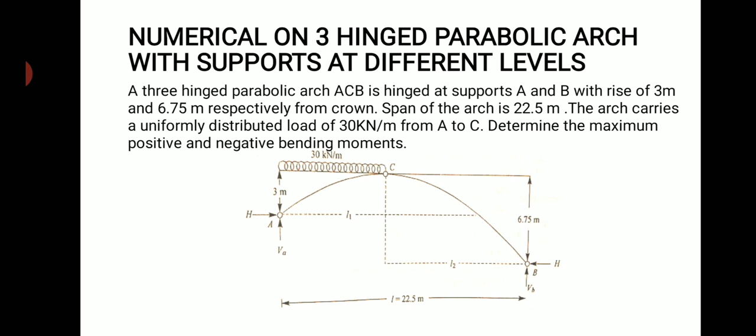Here L is the total span distance, and in the sketch they have given the different heights of the rise from the respective supports, but they haven't given the values of L1 and L2, wherein L1 is the length between the support A to C, and L2 is between the support B to the crown point C.

Okay, so the first and foremost step, in order to determine the positive and negative bending moments, is to find out the different spans between the supports and the crown point. So the first step is to determine the values of L1 and L2.

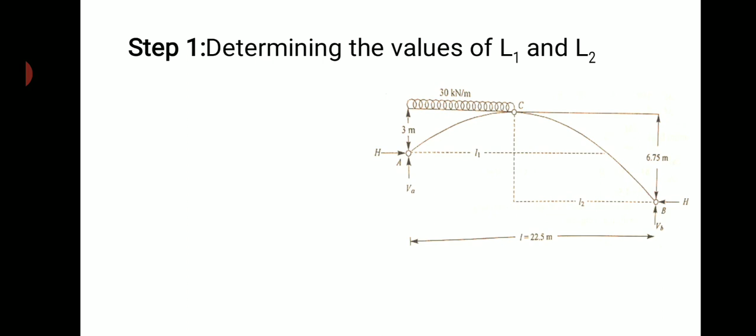Since it is given as a parabolic arch, we have the property of parabola: L1 square by H1 is equal to L2 square by H2. I repeat it, L1 square by H1 is equal to L2 square by H2, wherein L1 is the span between support A to crown point C, and L2 is the span between the support B to the crown point C. H1 is the vertical height of the rise between A to C, and H2 is the vertical height between the support B to C.

So here L is equal to L1 plus L2, and L1 is equal to (L1 plus L2) into root H1 divided by root H1 plus root H2. This formula has been derived from the property of parabola. L1 plus L2 is nothing but the total value, which we can take as L itself. So it can be straight away set as

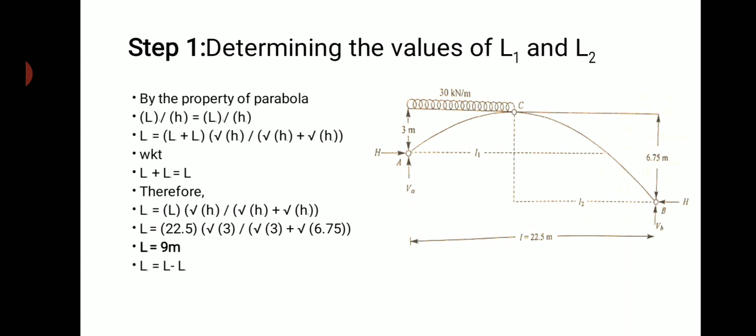Again, we know that L1 plus L2 combined gives L. So L and L1 are known. By this we can find the value of L2: L, 22.5, minus L1, 9 meters. So 22.5 minus 9 gives 13.5 meters. That is the span length between the support B and the crown.

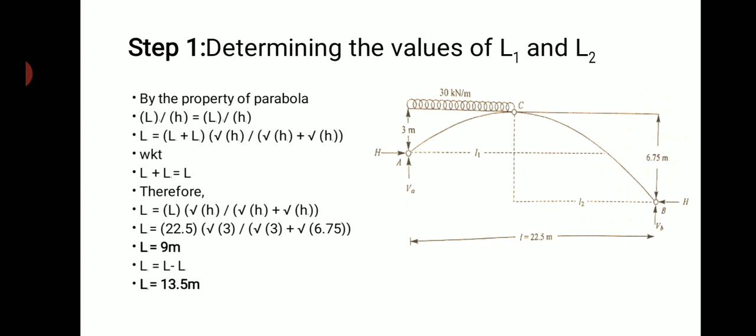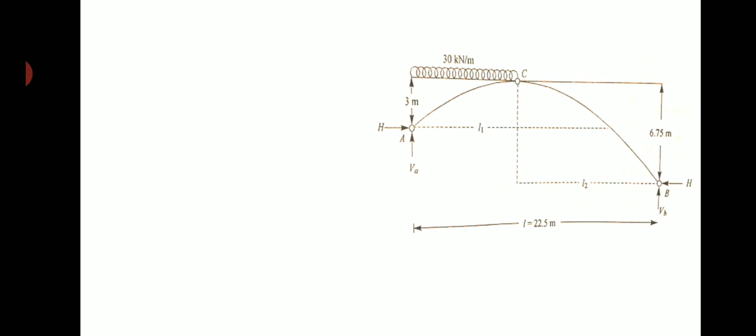Coming on to the next step, applying the equilibrium conditions in order to determine the support reactions. I apply the vertical equilibrium conditions for the arch. For the supports we have two vertical reactions, VA and VB, which are in the upward direction. Upward forces are taken as positive and downward forces as negative as per the sign convention.

So VA plus VB is equal to 30 kilonewton per meter, the UDL load given, acting over the span L1. L1 we have determined as 9 meters. So the 30 kilonewton per meter needs to be converted into kilonewton first, multiplied by the total distance over which the load is acting. So 9 meters is the total distance over which the load is acting.

Therefore VA plus VB will be equal to 30 into 9, that will be equal to 270. Since the 30 into 9 is in downward direction, I have equated upward forces equal to the downward force in order to obey the equilibrium condition.

So the next step is moment about left support, moment about the crown. So I have to take the moment about crown in order to determine the value of H; H is another unknown here. So in order to determine the value of H, that is the horizontal reaction, I need to take the moment about crown. So first I am going to take the moment about crown from the left side support.

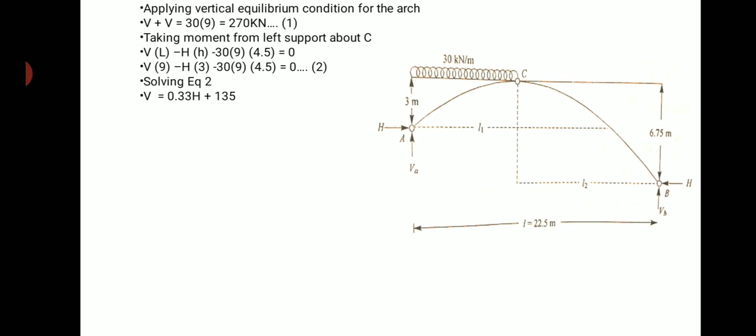Now, since it is a different level of support condition here, I have to take the moment about C point from the right side of the support. Since the supports are at different levels, I need to consider the moment about the crown from both supports and equate that to 0 in order to get the value of the horizontal reaction. The forces acting on the right side are VB and H: only two forces, the vertical reaction at B and the horizontal reaction H.

Again the sign convention here is clockwise positive and anti-clockwise moments negative. So VB into L2 is in anti-clockwise direction, and then H into H2. If I just solve this, I'll get the equation as VB is equal to 0.5 H.

So, from considering equation 1, I have got VA plus VB as 270 kilonewton. So if I just substitute the values in terms of H, that is VA I have got as 0.33H plus 135, and VB I got as 0.5H. So substitute the values in terms of H in equation 1. By solving that equation I'll get the value of H as 162 kilonewton.

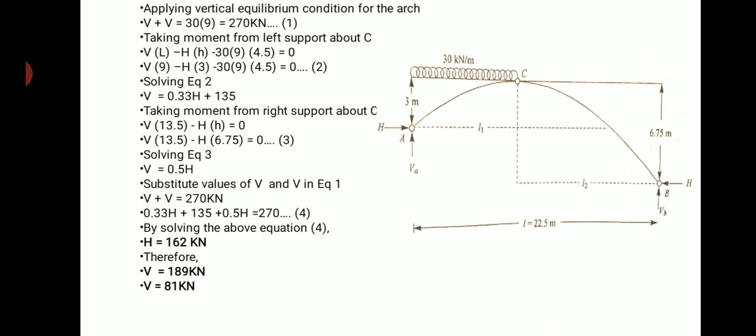So after finding the value of H, if I just substitute the values in the equations, I'll get VA as 189 kilonewton and VB as 81 kilonewton. So by this I have found out the different support reactions. The next step is to determine the maximum positive bending moment and the negative bending moment. The first thing is to determine the maximum positive bending moment.

For that, I always suggest that whenever there is unsymmetrical loading... In the sketch, I can observe that only the left part of the support, the support A side, is subjected to the external loading. Whereas on the right side of the support, there is no external loading; only you have the support reactions.

So by seeing the sketch, you can directly guess where the position of the maximum positive or negative bending moment will be. Wherever there is loading, in that part you can suggest there will be the maximum positive bending moment. So with that assumption, I have taken the left part of the arch.

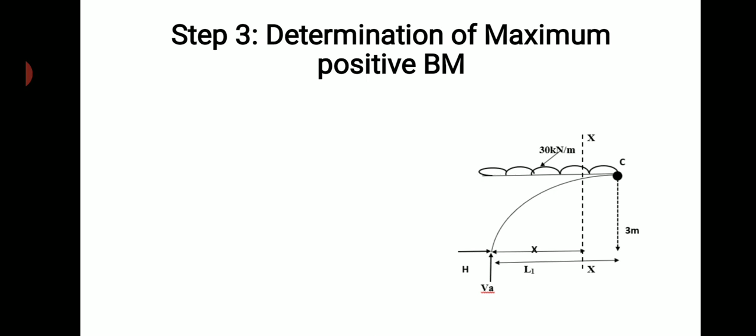I have considered the section xx, which is at a distance x from support A, and which has the vertical distance y, that is the vertical distance between the arch rib and the support level. And L1 is the span distance between support A and the crown.

Okay, so I'm considering the section xx and the moment about section xx. In order to determine the positive bending moment, I consider the moment about xx. Here I can see three forces: one is Va, another is H, and one more is 30 kilonewton per meter, acting over the distance x. It is not L1, it is x, because I am considering the moment about section xx.

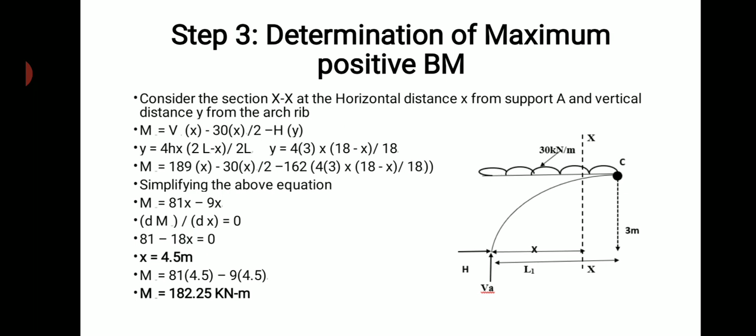If I substitute the value of x in the simplified Mxx equation, I'll get the maximum bending moment. That is 81 times 4.5 minus 9 into 4.5 square. If I do it, I'll get the maximum positive bending moment, that is 182.25 kilonewton meter. So this is how to determine the maximum positive bending moment.

The next step is the determination of maximum negative bending moment. While determining the maximum positive bending moment, we considered the left span, because on the left side of the span the load was acting. On the right side of the span there is no external load, therefore you can directly say that it will be subjected to the negative bending moment. With this assumption, I am considering the right side of the span.

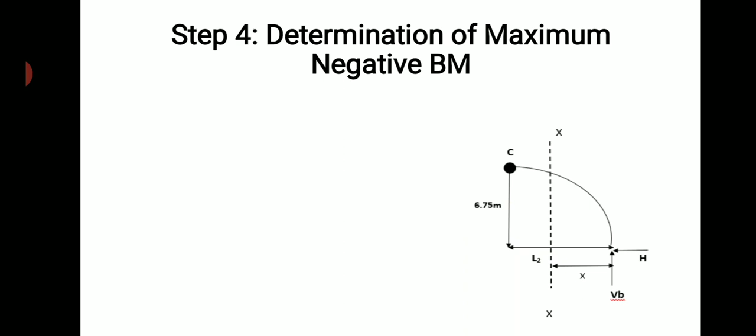For the right side of the span, I consider again the section xx, at a distance x from the support B, and L2 is the span length from B to the crown point, and H is the rise, which is 6.75 meters. Here y is the vertical distance between the arch rib and the support level. Again I need to find the moment at section xx. Only two forces I have here: VB and H. So VB into x minus H into y.

Here I need to put the general parabolic expression: y is equal to 4hx into L minus x divided by L square. For the right side, since it is a different support condition, L will become 2L2. Therefore, y equals 4hx into 2L2 minus x divided by 2L2 square. If I substitute the values, I'll get y, and substituting y in the moment equation, I'll get the simplified form of the moment equation as minus 81x plus 6x.

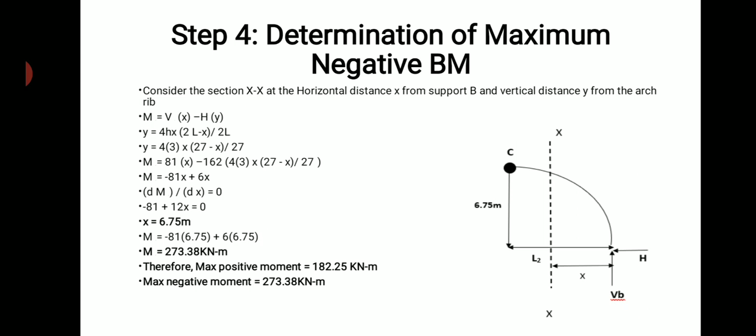So these are the values of positive and negative bending moment. Maximum positive bending moment I have got as 182.25 kilonewton meter, and negative bending moment as 273.38 kilonewton meter. Thank you.